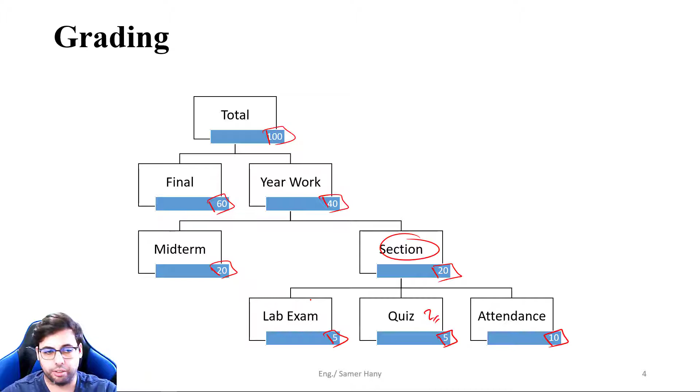Okay, before starting our first topic, let's give a brief introduction of our scope in this subject this semester. General Chemistry for Engineers is not pure chemistry - we're interested in the industrial scope of chemistry. The first 2 topics we'll discuss will be industrial applications of chemistry: the first is how to produce cement, and the second is how to produce lubricants, and we'll discuss all the different aspects and factors, like you'll see today shortly.

Then we'll go into calculating all parameters for ideal gases and real gases - pressure and volume calculations, temperature, and everything. After that, we'll go into thermochemistry and combustion reactions, because most industrial applications will somehow have a furnace or heating application, where we burn some fuel to get energy. By calculating the amount of energy required, we can use thermochemistry to deduct and calculate how much fuel we need and how much air we need for that fuel to be oxidized, burned, or combusted.

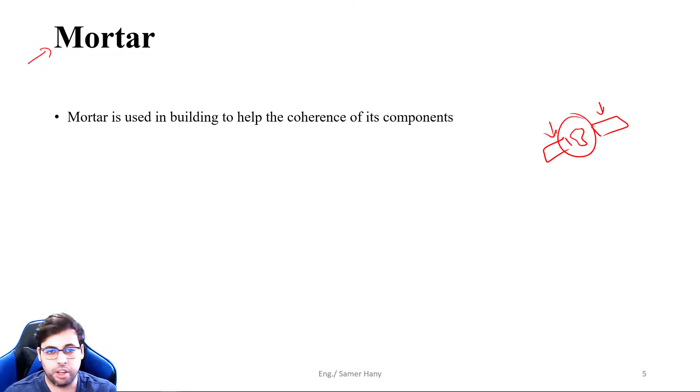We have two types of mortar: aerated mortar and hydraulic mortar. Mortar generally consists of sand in both types, and an active ingredient that reacts with something to harden or become solid. In the case of aerated mortar, it's slacked lime.

The slaked lime is calcium hydroxide, which reacts with air, or specifically carbon dioxide from air, hence the naming aerated mortar. The products of this reaction are calcium carbonate and water molecules.

As for the hydraulic mortar, it's sand plus cement. This cement is the active ingredient that reacts with water to harden and solidify, hence the naming hydraulic, coming from water. We won't discuss the exact reactions here because they are multiple reactions, not just a simple reaction like the aerated mortar. We'll discuss these reactions in a couple of minutes in this tutorial.

So why do we see hydraulic mortar very often and not aerated mortar? Because from a strength point of view, aerated mortar is much weaker than hydraulic mortar. So it's mainly used when there's no water present, or water is scarce or an expensive resource, like building in the desert, or building something small that won't have to withstand high load, like a fence or a wall.

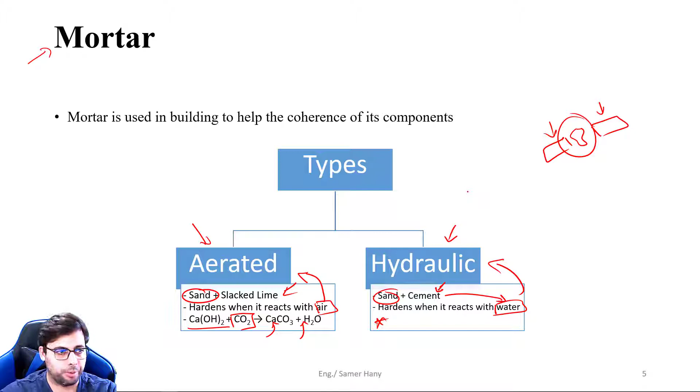In the desert for military purposes and stuff like that. But for hydraulic mortar, when we want to build units or entire buildings that will have to withstand very high loads, we need to use hydraulic mortar or cement, especially when using it in concrete to build ceilings and concrete blocks for withstanding high loads above them.

So first off, we'll focus on cement, because this material needs to be produced in very, very large amounts, because we use it in all the buildings around us. So it's a very essential compound or product.

The most common type of cement, the gray cement you see everywhere, is called ordinary Portland cement. Why Portland? Because this cement was actually found first in nature in Portland, not synthesized. Once we discovered this material and its properties, the strength it gains when it reacts with water, we started experimenting, checking, and analyzing the components inside that product to be able to produce it industrially on an industrial scale later. So this is ordinary Portland cement, OPC for short.

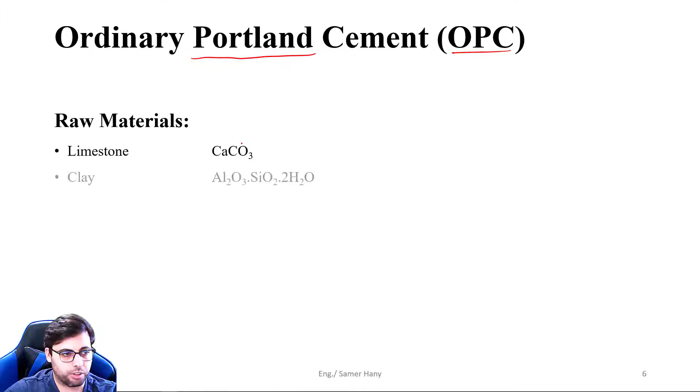To produce that cement, we need some raw materials. The raw materials are limestone, which is calcium carbonate; clay, which is aluminum oxide and silicon oxide bound together with two molecules of water in their crystal structure; and to a low extent, some ferric oxide. We'll see what this ferric oxide does and how it benefits our reaction.

So the cement is actually composed of four main oxides: calcium oxide, aluminum oxide, and silicon oxide, which are the components responsible for most of the functionality of the cement. As we see here, there is some ferric oxide, which is not always present in all types of cement, but it's an addition that we use in producing ordinary Portland cement.

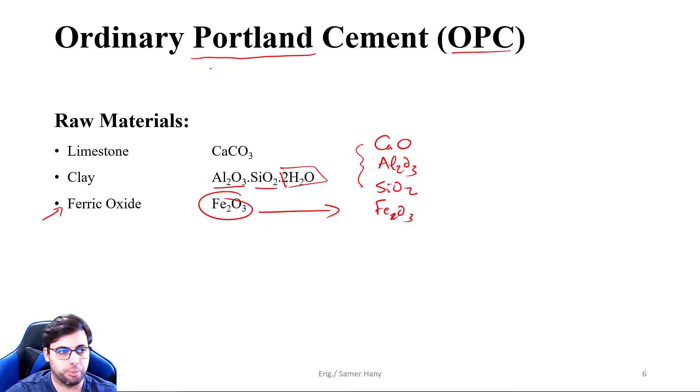Some notes here: the ferric oxide addition helps the formation of clinker. Clinker, which we'll discuss later, is the intermediate product in the cement production process. It helps the formation of clinker in the main reactor in the factory at lower temperatures, around 1300 degrees Celsius. Without ferric oxide present in the mix, this reaction would be at 1400 degrees Celsius instead of 1300, and this saves us some energy, fuel, and cost when producing the cement.

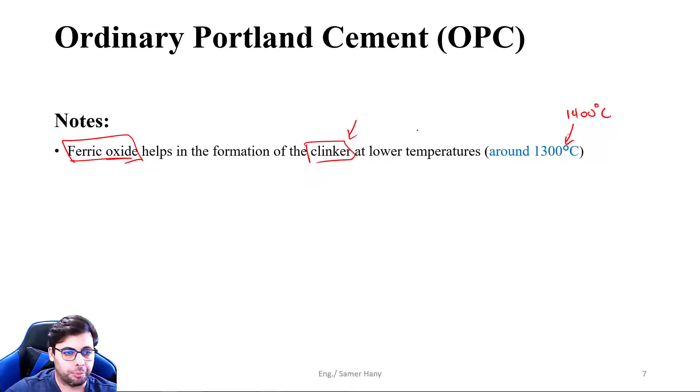This ferric oxide is actually the main reason ordinary Portland cement is gray instead of white. If we want to produce white cement used for decorations, it's basically the same, but we don't add ferric oxide, hence the higher price for white cement compared to ordinary Portland cement. A second additive we add is calcium sulfate, or gypsum, which is calcium sulfate dihydrate, with 2 molecules of water. This is added to retard or slow down the setting or solidification of the cement mix, the mortar or concrete. It's a retarding agent to give workers time to form the cement or mortar before it starts solidifying.

Okay, this is added to around 5% of the total mix, and we'll see in our production process right now in which stage it's added.

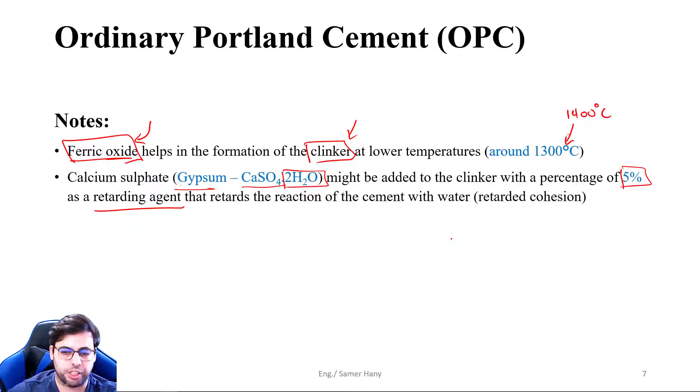The main components of ordinary Portland cement, responsible for its functionality, are calcium silicates. Dicalcium silicate is 2 calcium oxides linked to 1 silicon dioxide, and for short, instead of typing the entire chemical formula, we write it as C2S. So it's C2, 2 of the calcium oxide with 1 silicon dioxide. As we said, cement is composed mainly of oxides, 4 oxides. So when we see this C, it stands for calcium oxide. It's not calcium alone, and it's not carbon, because this is not a chemical compound, it's just a shorthand representation for this compound.

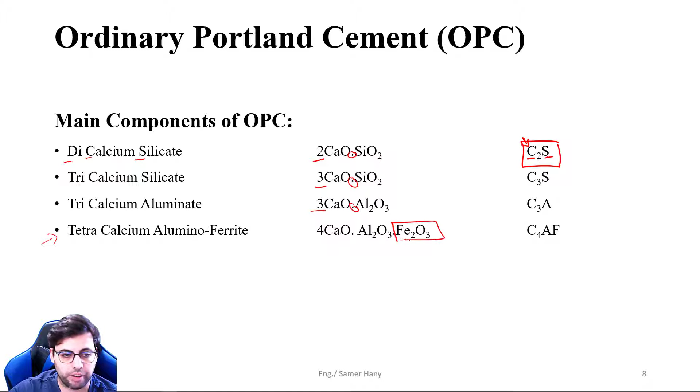Same goes for tricalcium silicate: 3 calcium oxide moles linked to 1 silicon dioxide mole, called C3S. For tricalcium aluminate, it's 3 calcium oxide moles with 1 aluminum oxide mole, so it's C3A. Then the 4th compound, formed due to the presence of ferric oxide, is tetracalcium aluminoferrite, shorthand C4AF. So that's 4 calcium oxide, 1 aluminum oxide, and 1 ferric oxide.

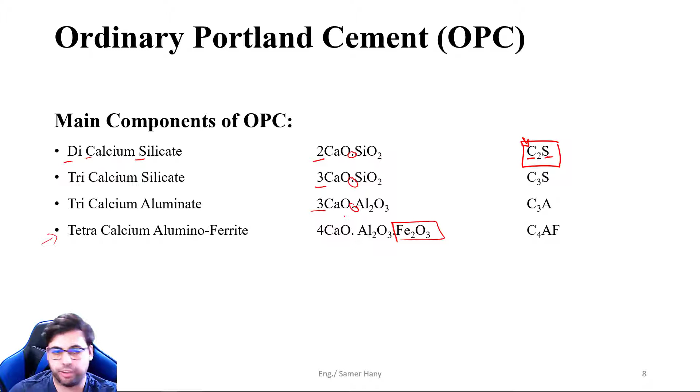So for the production process, we take these raw materials. The first step is crushing, because we just got these raw materials from the quarries and they are in big bulks. So we insert them in the first stage into a crusher to crush them into smaller bulks or smaller stone size. Okay, let's actually see this crusher in action.

So here's the crusher, let's just go over it. This is called a jaw crusher, because it's shaped like a jaw, and this is a stationary side...

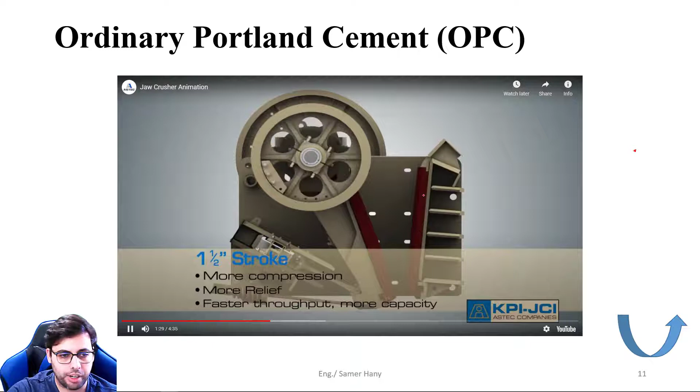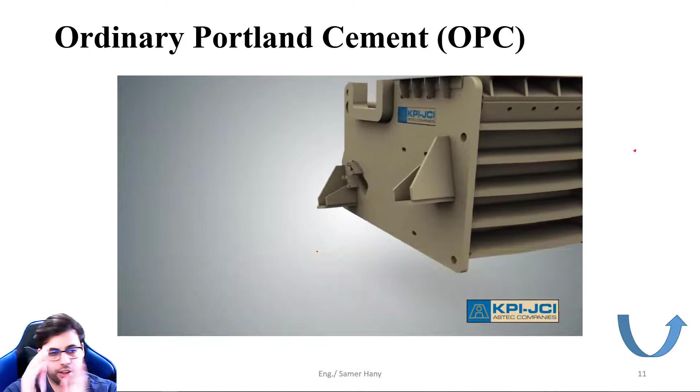So this is a stationary side, and this is a moving side. It's linked to a motor that simulates a jaw opening and closing, and all the bulk materials going in from the big opening get crushed into smaller size stones or solids, and go out from the smaller opening at the bottom.

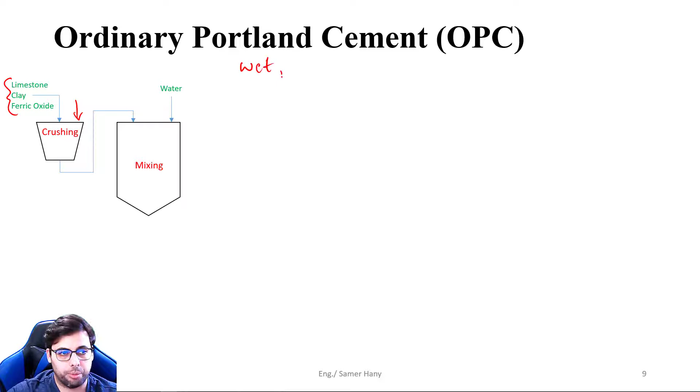Okay, let's go back to our process. After crushing, we take these solids mixed together from the crushing stage into a mixing tank, and in this mixing tank we add some water to help create a consistent mix or paste. Actually, the process of producing OPC that we're studying right now is called the wet process of producing OPC. If you research online, you'll find multiple processes used to produce cement. The most common are the wet process and the dry process, and we'll just study the wet process this semester.

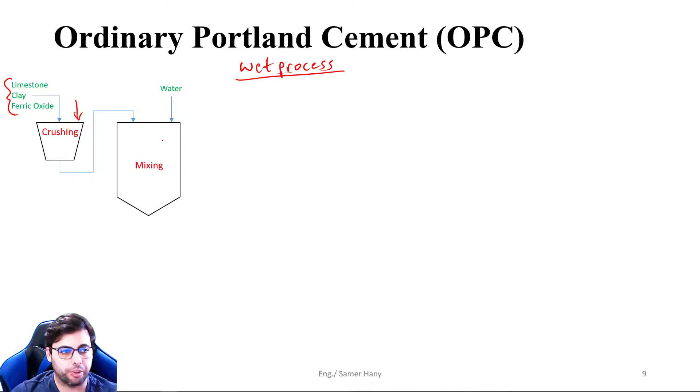So in the mixing tank we add water to create a more consistent mix, and after mixing we go into grinding. Why do we want to grind the material? To increase the surface area and gain a consistent powder, and mixing powders is easier and will produce a more consistent mix than having bulky solids.

So in this grinder, this is a ball mill. It grinds the smaller bulky solids coming out of the crusher into fine powder. Let's also see how this grinder works. This ball mill has some balls inside, made of a harder material than the raw materials we're using.

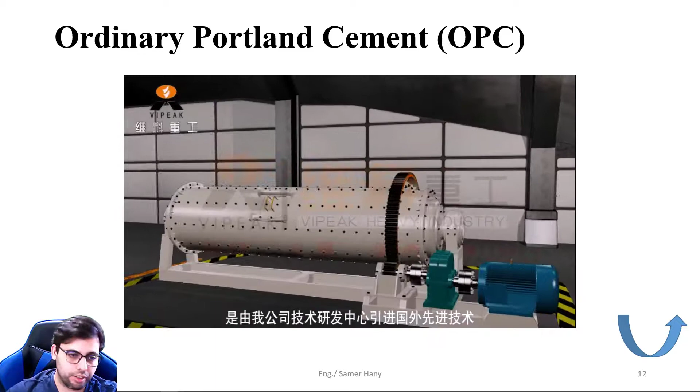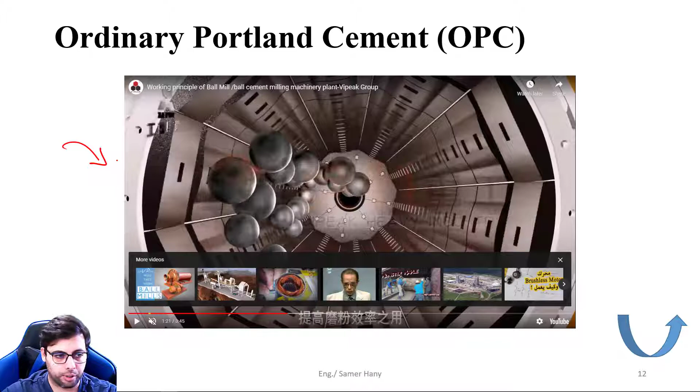It's a hollow cylinder that rotates around itself with some hard balls inside. We insert the material into this grinder or ball mill, and when the balls drop, they drop on other balls and the raw material bulky solids. Since the balls are harder than the material we want to grind into fine powder, these raw materials will be crushed further and will, in the end, be produced as fine powder. Okay, let's go back.

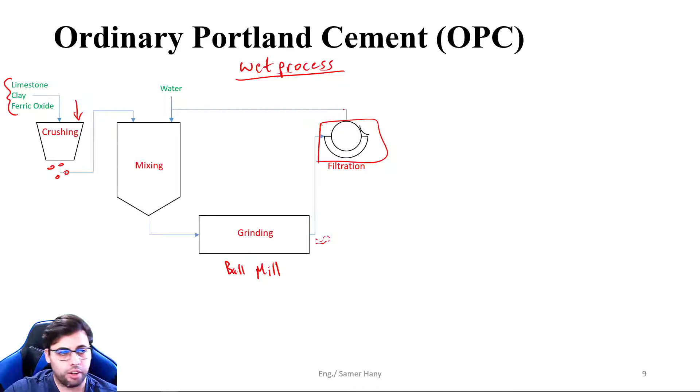This filter just splits the mix going into it into two streams. For this drum in the middle, it suctions the water, and this water is recycled to the mixing tank, while the solids go into the main reactor. The solids are retrieved from a knife, and we can also see how this filter works. This is called a rotary filter.

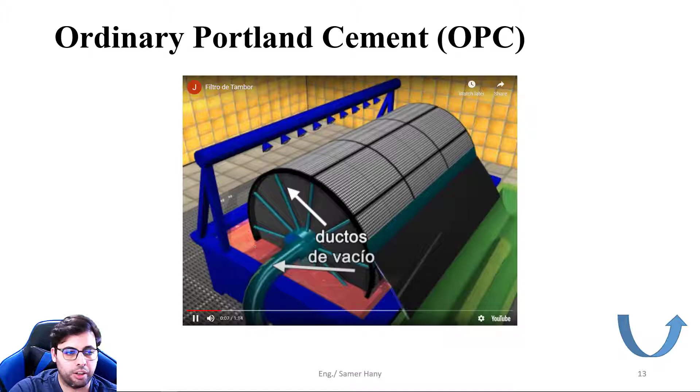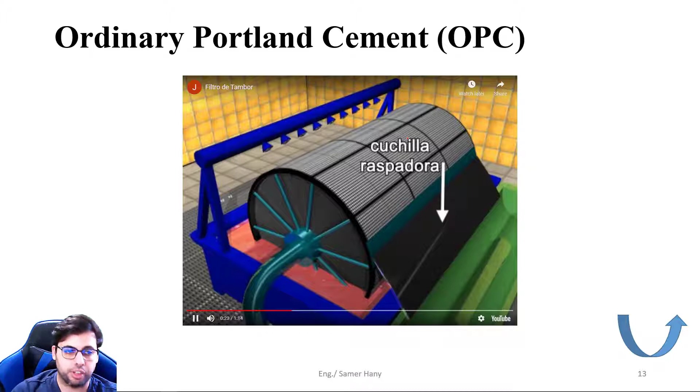This rotary filter consists of a drum that's rotating. There's a sink here in which we insert our materials, the suspension of water and solids, and this drum rotates around itself. The drum surface is actually a filter fabric, and this pipe is linked to a suction or vacuum pump that suctions the water off the surface, while the solid cake resides on the surface.

The solids can't go into the drum, and once the drum rotates around itself, they reach this sloped knife, and this knife scrapes the solid or cake layer off of the drum, while the drum keeps rotating around itself.

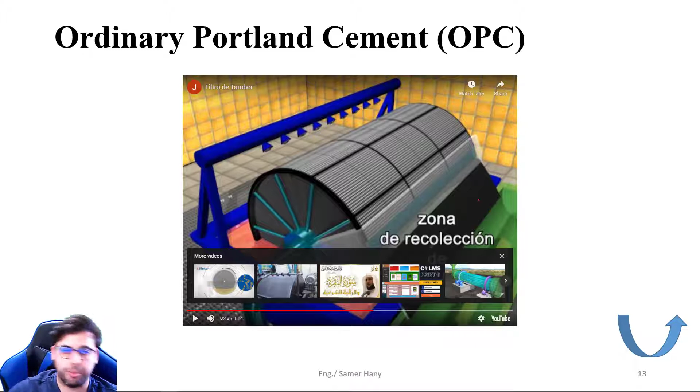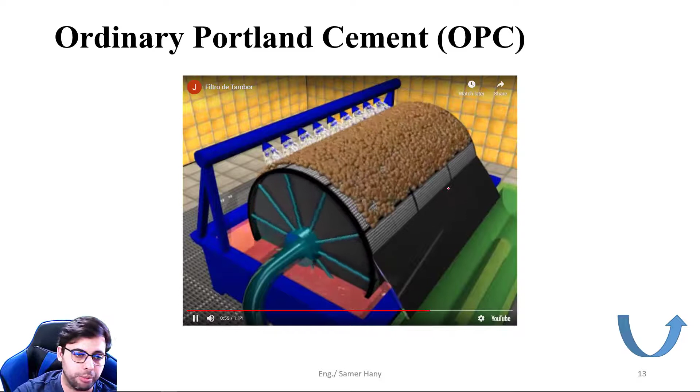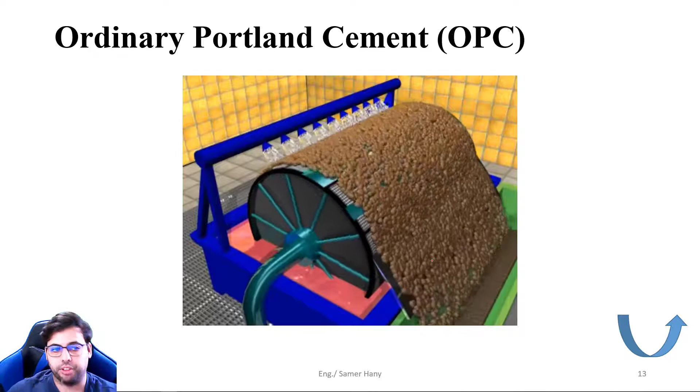There's an animation here showing this. As you can see, the solids cannot go into the filter medium. The suction takes most of the water, though not all of it, and then this knife scrapes all of the solid or cake off of the surface of the filter drum.

This cake produced is mostly solid mixed with some water. So we have removed most of the water that we can remove, and the remaining water we can just get rid of or vaporize inside the reactor.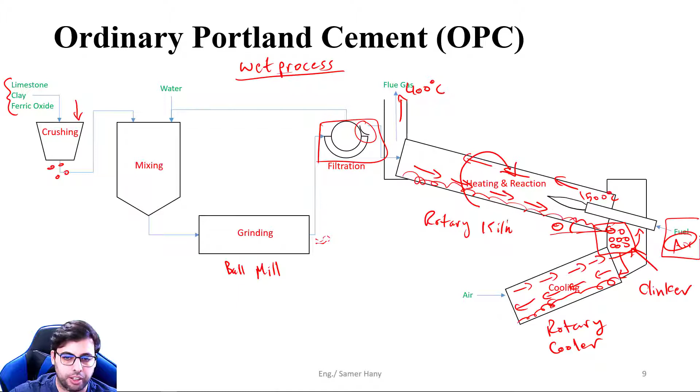We use it in the burner with some excess air from the surroundings. This depends on calculations we'll discuss in the thermochemistry chapter. The clinker leaves the cooler still a little too hot, so we do a further cooling stage.

This further cooling stage is the clinker pile. This is just a pile of clinker to let it cool slowly until it goes down to around the surroundings or ambient temperature. This is just a pile in an open area—we pile the clinker and let it cool for some time.

Then we grind this clinker, because the clinker produced from the kiln is porous balls of solid, about 1 to 2 inches in size, so they're not actually powder. We take this clinker after cooling and insert it into the grinding phase, or the ball mill—this is also a ball mill, or could be any other type of mill.

We grind this clinker to produce fine powder cement, and add all the additives we need, mainly gypsum, and any other additives in this step, since it will be mixed thoroughly with the clinker to produce cement. The last stage is to pack this cement into 50 kilogram packs, and then we've got the final product cement.

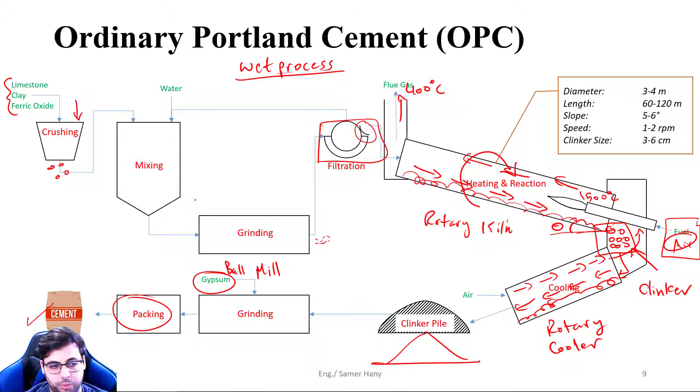That's what we'll discuss later. Before moving forward, we need to know how we'll determine if this cement is according to standards or not. So after producing the cement, we need to know the reactions this ordinary Portland cement goes into with water.

We said we have 4 main components, and we can say there is C4AF, because this compound plays a similar role to C3A, so it's not present as an individual product, and it's always in a small percentage. We won't go into the chemical reactions themselves—we'll just mention which component of the main cement compounds is responsible for which role or function in the solidification and hardening of the cement.

And the reaction time, which is the most important factor for us right now: the reaction time for C3A is 6 minutes to 3 hours, so it's the fastest component to react with water, and as we said, C4AF plays a similar role to C3A. This is responsible for the initial setting of the cement—the initial solidification without any strength, just transforming from a paste into solid, no strength yet. Second is the C3S, the tricalcium silicate.

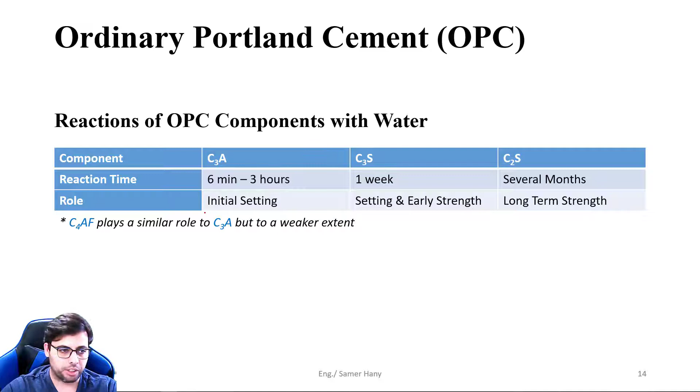So this is just a schematic diagram, not to scale, just to show us the strength of each compound. The C4AF reacts faster than the other compounds, with C3A and C3S. C4AF is very weak here, the strength level is very weak, and C3A is just above it.

For C3S, it starts a little slower in the beginning and then rises fast like this. So C3S reaches a very high strength level, and this is why it's responsible for the early strength of the concrete.

C2S will start slow at the beginning because it can't compete with C3S for reacting with all of the water. After C3S is almost done or completely done, the C2S compound starts reacting somewhat rapidly with water, or to a faster extent, and goes to nearly the same strength level at the end of the reaction.

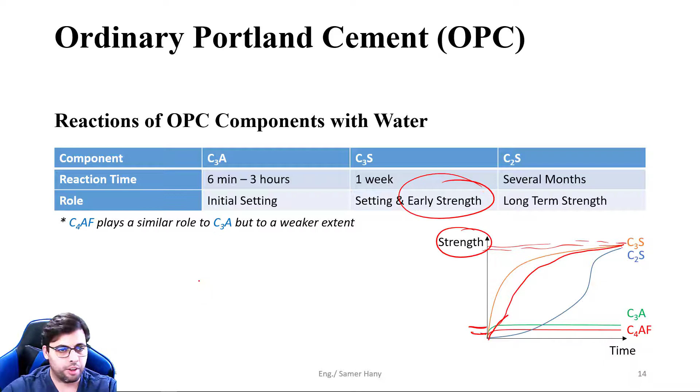So let's dive into the quality assurance tests. The first standard test is the hydraulic factor. The hydraulic factor just measures the relative amount of calcium oxide relative to all of the other oxides in the mixture or in the cement.

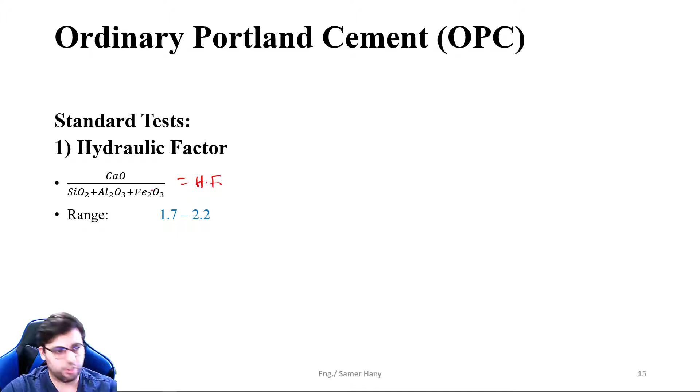Let me remove the marks. The range for this hydraulic factor, let's call it HF, must lie in the range 1.7 to 2.2. You don't need to memorize this expression, you just need to know what it represents or what it measures, the range for that particular factor, and what would happen if we lie outside the boundaries, whether it's lower than the minimum or higher than the maximum.

If the hydraulic factor is lower than the minimum, this means that C3S will be formed to a lower extent than the standard amount. Why is that? Because calcium oxide is actually the main oxide that reacts with all of the other oxides in all of the compounds. All of the compounds start with C, of course, because it reacts with all of them.

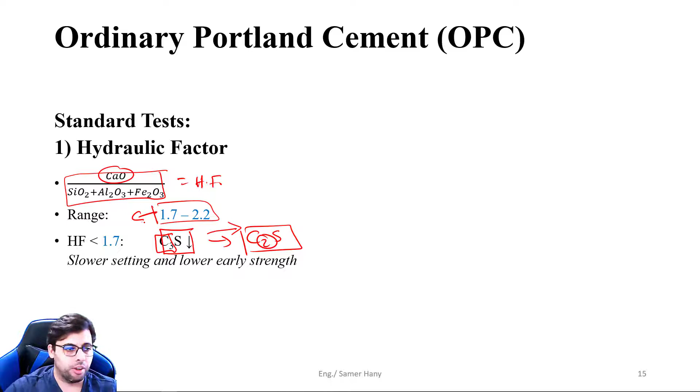If we see here, C3S has a very high content of calcium oxide, and we have another compound, C2S, between calcium and silica, which has a lower concentration of calcium oxide. So when the amount of calcium oxide gets lower, the reaction will actually be directed more towards C2S than C3S, since there isn't enough calcium oxide to react and form C3S in the proper amount.

If we know the features, functionality and roles of each of the components, we can know exactly what would happen when one of them is affected by making it higher or lower than the standard amount. Since C3S was responsible for the setting and early strength of concrete, a lower amount of C3S will result in a slower setting and lower early strength.

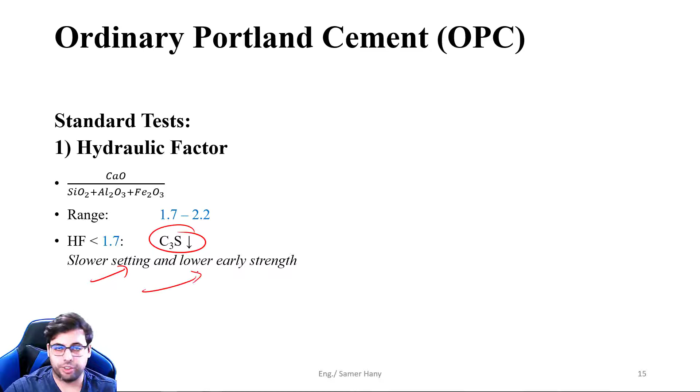So what happens if it exceeds the maximum? Then we have free lime in the cement. Free lime means the calcium oxide already reacted with all the available other oxides, and there is some more calcium oxide that didn't find any oxides to react with. Why is this a problem for us? This calcium oxide is the quicklime, if you know quicklime from studying chemistry before. This reacts with water and produces a high amount of heat. So this is a highly exothermic reaction which produces heat.

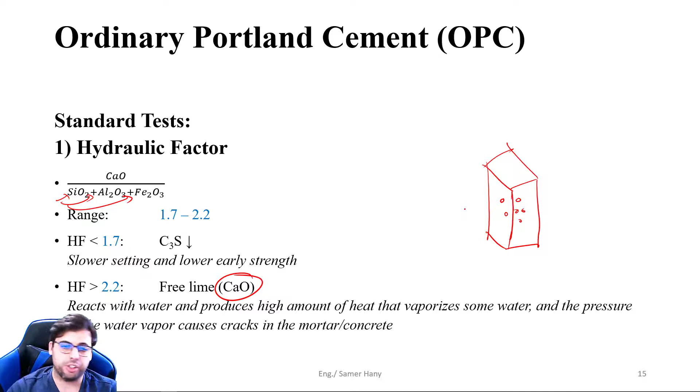What would happen if we have a concrete block like this with an exothermic reaction happening inside it, and there is some water around this reaction? The water will start vaporizing and bubbling inside that concrete block, and the water vapor pressure will keep increasing as the reaction goes on and the temperature increases, and this will eventually build up enough pressure to create its own path and get out of the concrete block.

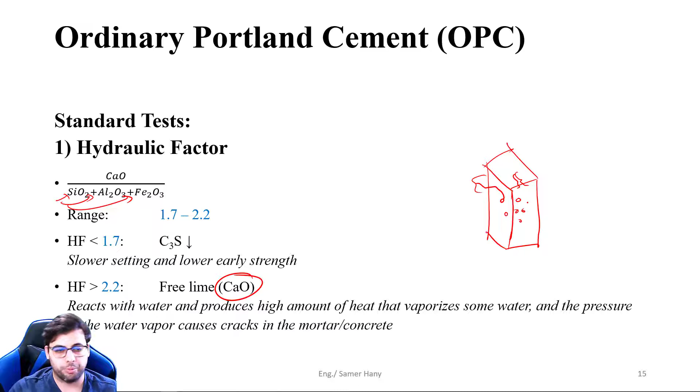So it will produce or result in some cracks in the concrete, so that the water vapor can go through them and out of the concrete block.

This test was actually replaced with a newer standard test, the lime saturation factor, LSF. This takes into account that when analyzing the cement, not all of the calcium oxide comes from the clinker or the main components. Some calcium oxide actually got into the mix from adding the gypsum in the last ball mill. So this is just a correction factor to adjust for the calcium oxide coming from the gypsum, and some coefficients to adjust for the mass balance.

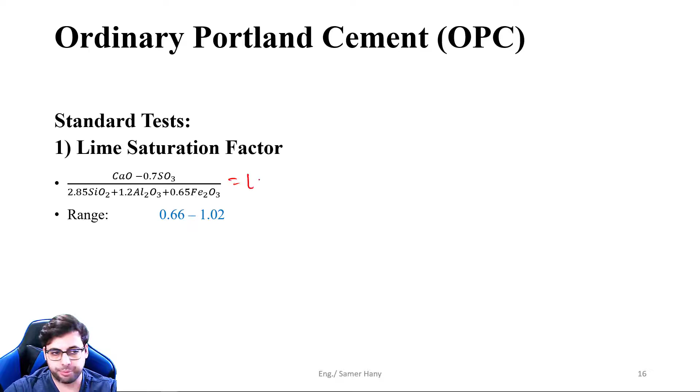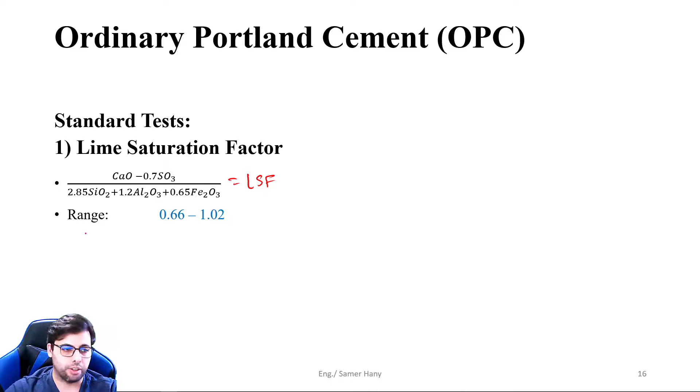As we said, we do not need to memorize the expressions. We just need to know what this test is actually measuring or representing. Of course the LSF will produce different results numerically, and the range will be different - between 0.66 and 1.02. The same goes if it's lower than 0.66 as the hydraulic factor, and if it exceeds 1.02, it's also the same as with free lime.

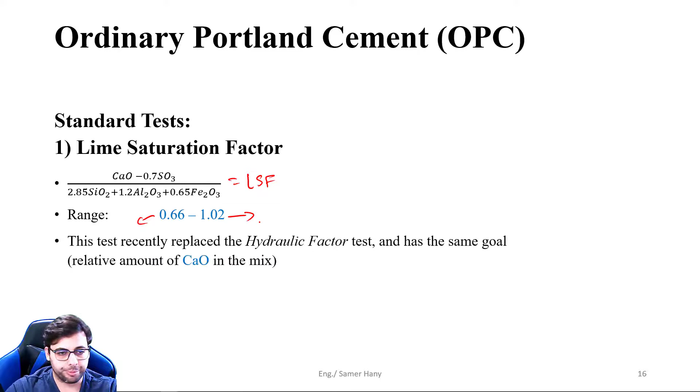Moving forward to the next test, the silica index. The silica index measures the relative amount of silica, or silicon dioxide, to the other oxides in the mix, except for calcium oxide.

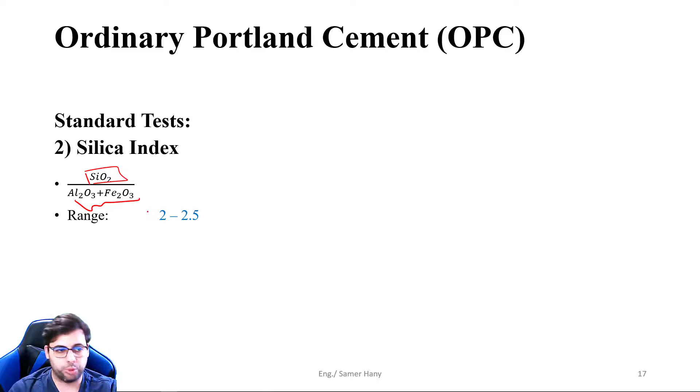This range is from 2 to 2.5, and if the silica index goes below the minimum of 2, let's focus first on these two compounds which have a higher percentage of silica: C2S and C3S. By mole percent, C2S has 1 silicon dioxide to 2 calcium oxide, so by mole this is 33%. We can convert this to by mass, but we'll represent it by mole for now. As for C3S, this is 25%, because 1 silicon dioxide is inside the entire compound, which is composed of 4 different moles or molecules. So C2S has a higher percent, and C3S has a lower percent of silica.

When the silica goes below the standard range, that means the compound with the higher silica percent will form in a lower extent, and the compound with the lower silica percent will form in a higher percent. So C2S, which has higher silica content, will form in a lower concentration, and C3S, which has lower silica content, will form in a higher amount. Consequently, C3A will increase because we didn't consume as much calcium oxide since the silica is already down. So setting and solidification will be very fast since C3A and C3S are both up in amount.

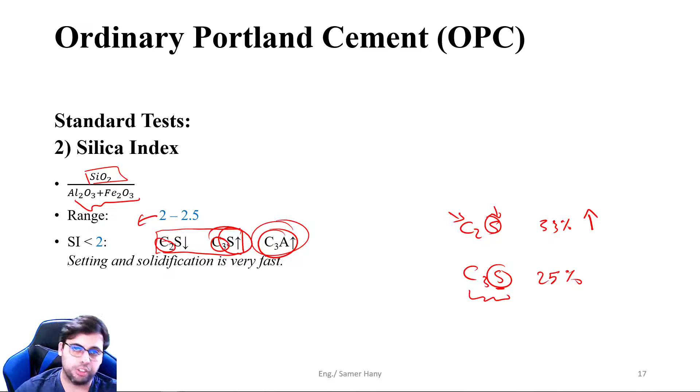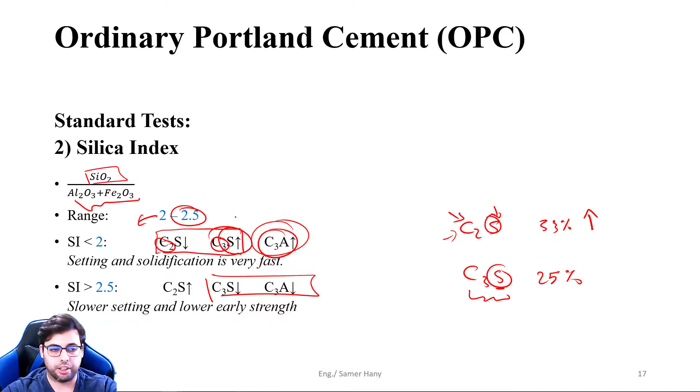The reverse happens if the silica index falls above or exceeds the maximum limit. So C2S, which has higher silica content, will form in a higher amount than usual, and C3S and C3A will form in a lower amount than usual. This indicates slower setting and lower early strength of the concrete, since C3S is lower.

The third test is the magnesium oxide percentage, and this percentage should not exceed 5%. A higher percentage of magnesium oxide means that the quality of the used limestone is poor.

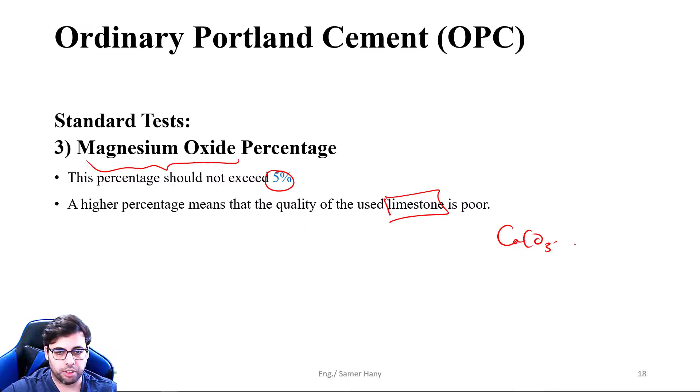This should surprise you - magnesium oxide. We didn't mention magnesium oxide in any of the previous slides as raw materials or additives to the cement. Where does this magnesium oxide come from? It comes from the limestone or another raw material called dolomite, or dolomitic limestone, because in the quarries, limestone, or calcium carbonate, is usually linked to magnesium carbonate as well. Unless we have a very pure quarry with very pure limestone, like 99.9% calcium carbonate, it's possible to find some magnesium carbonate linked to it as well. This raw material is called dolomite when the amounts are equivalent, and if we just have a small amount of magnesium carbonate, this will be called dolomitic limestone.

This indicates that the limestone is poor for our application or industry, because 5% in the mix means that more than 5% of our total cement is not an active material responsible for sticking the blocks together and forming strength. It's just an inert solid inside our mix, not helping the function of the cement. So if we calculate our loads and need 100 kilograms of cement for a particular application, maybe 5 to 10 kilograms will not actually contribute to the strength and coherence of the building unit, and we're underestimating the cement we're using. It will fail at a lower load consequently.

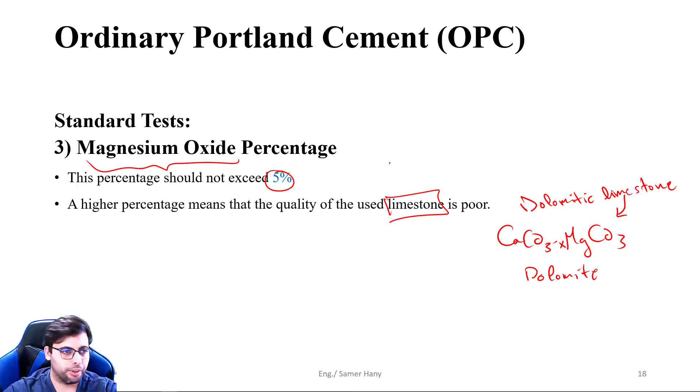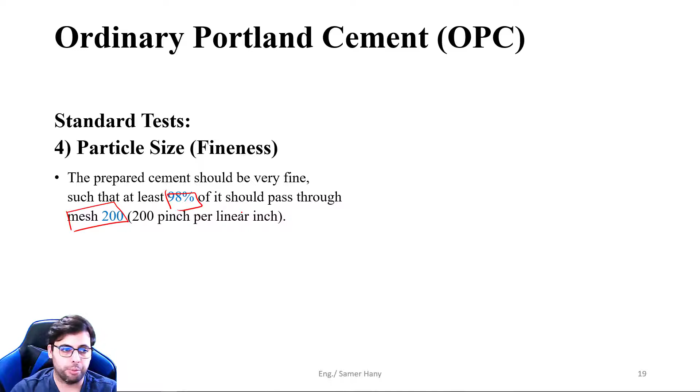So the particle size, test number 4, is the particle size or fineness of that cement powder. The standard for fineness is that the prepared cement should be very fine, such that at least 98% by mass of it should pass through a screen size of 200 mesh. The mesh is represented by the number of pinches or openings per linear inch. We'll see that in a moment.

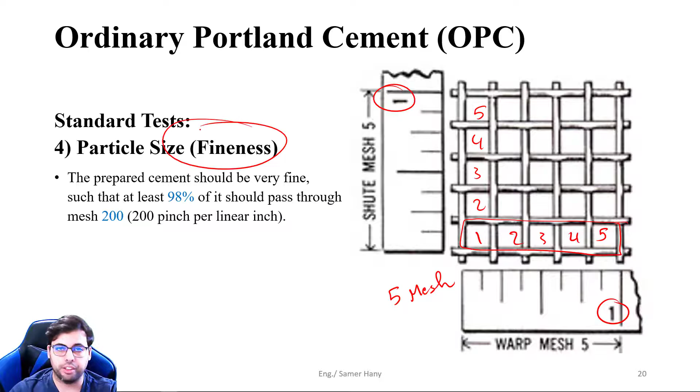How do we measure the mesh? If we take a sample of that screen, 1 inch in any linear direction, and count the number of openings or pinches inside that inch, that's the mesh number. For this particular screen we sampled, we have 1, 2, 3, 4, 5 openings in 1 linear inch, and this could also be done in the other direction, so it doesn't matter which direction we choose. We just need to sample 1 inch of the screen and count the pinches inside. So this would be a 5 mesh screen opening. That's how we measure or quantify the fineness of solid powders.

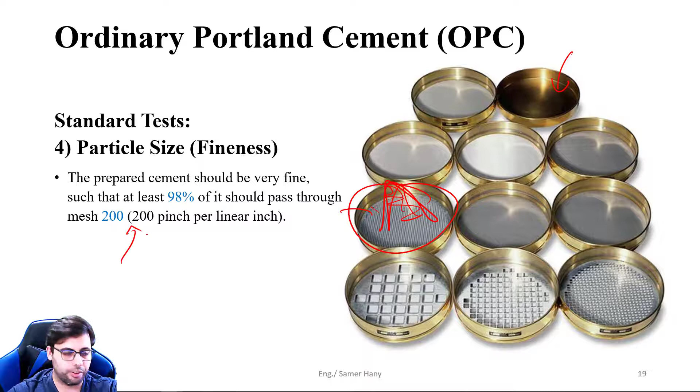Okay, and this means expending more energy, but we need to meet the standards. The 5th test is the setting time. Setting, as we discussed, is the initial solidification of the cement to transform into the solid state. This test is done to test the speed of cement solidification.

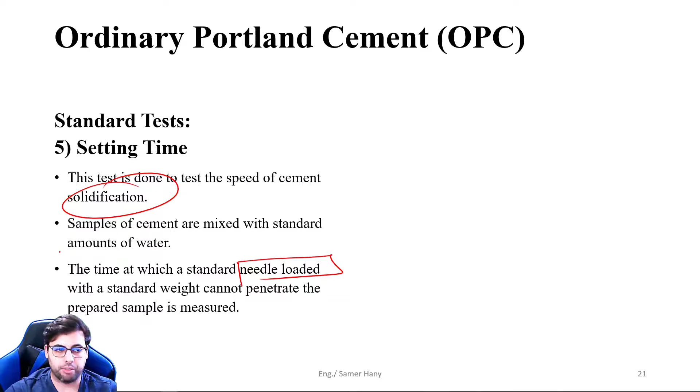Samples of the cement are mixed with standard amounts of water, making a slab of cement, and that slab will be tested to see how long it takes for it to solidify. So the time at which a standard needle, with a standard weight, cannot penetrate the prepared slab or sample of cement, this is called the setting time.

Okay, every minute or every couple of minutes we take that needle, drag it up, and leave it to fall under the standard weight, and see if it can penetrate this slab in this ring or mold or not. Once it cannot penetrate the surface of that slab, then this is called the setting time.

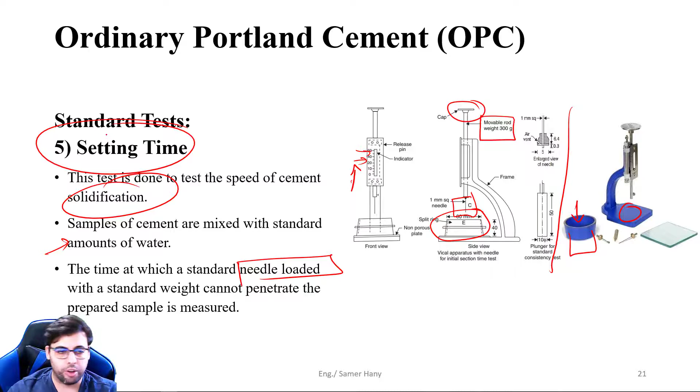This is the 5th test that we need to check. After measuring that time, we go into the standards and see, okay, is it within the standard time or not?

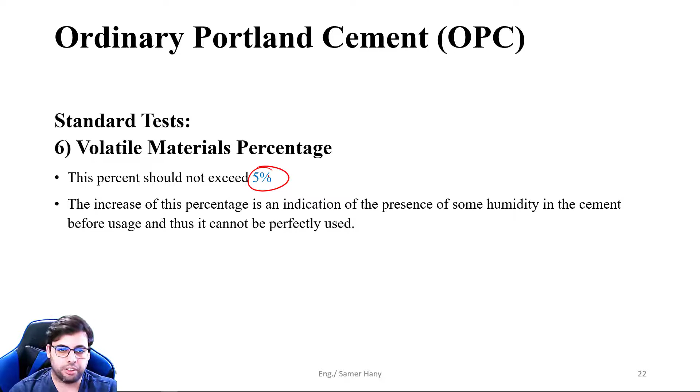So the 6th test is the volatile materials percentage. This percentage should not exceed 5%, just like the magnesium oxide. This indicates that the cement has some humidity content in it. This humidity will actually start reacting with some of the cement inside the packs, and will render it useless, or it will not be used perfectly when we need to apply the cement in real life. So in storage, this 5% of humidity or more will be reacting with some of the cement and converting it, or solidifying those particles, instead of having all of the cement as active material that will react with water when applied to solidify and stick together.

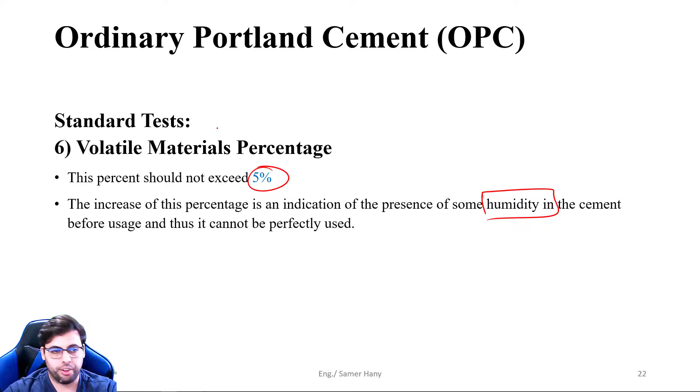So this means not only did we lose 5% or more of the cement content as humidity, we're only actually working with 95% of the actual mass of the cement. This 5% just spoiled or reacted with some of the 95% of the cement and made some of them useless. So we may end up with like 10% of useless mass underestimated in our calculations when we apply it.

All right, the 7th and last standard test for the quality control or assurance is the percent of sulfur trioxide. This should not exceed 3.5% of the total mix.

And this sulfur trioxide, where does it come from? It comes from the calcium sulfate, or the gypsum we added. When analyzing this, it will be broken down into calcium oxide plus sulfur trioxide. And of course, the water vapor will evaporate.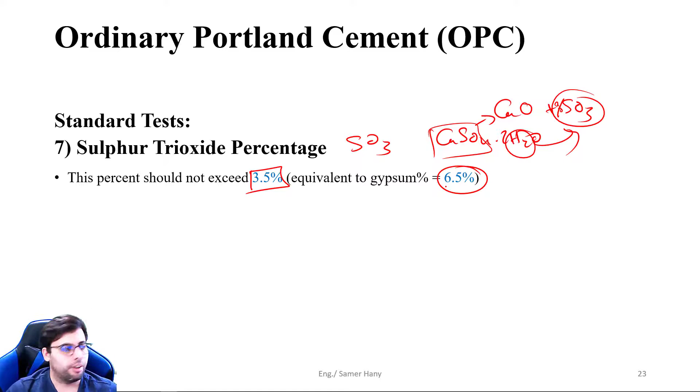So the percent of sulfur trioxide given by the analysis should not exceed 3.5%, which is equivalent to 6.5% gypsum. Any more than that means we've added too much gypsum, and the solidification process or reaction will be too slow for the application.

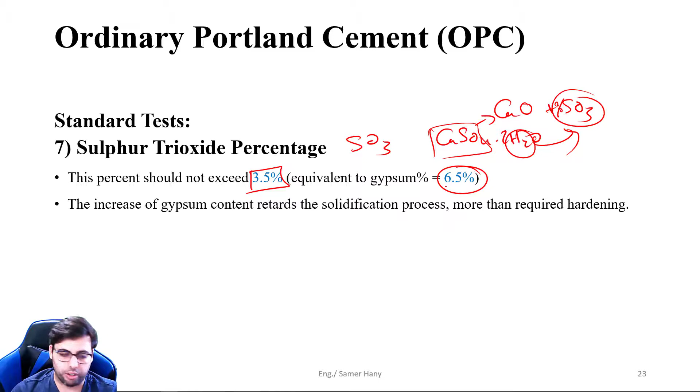All right, that's it for the ordinary Portland cement. Now we'll just briefly mention a couple of other types of cement, because it's not only the ordinary Portland cement that's out there, but it's the most commonly used and maybe the only one you've seen in real life applications around you, or maybe you also saw white cement for decorations. But these other types do exist, and if you look them up on the internet, you'll find more types than the ones we'll mention right now.

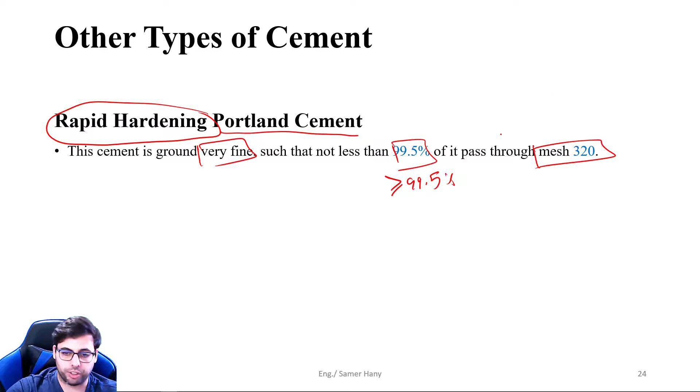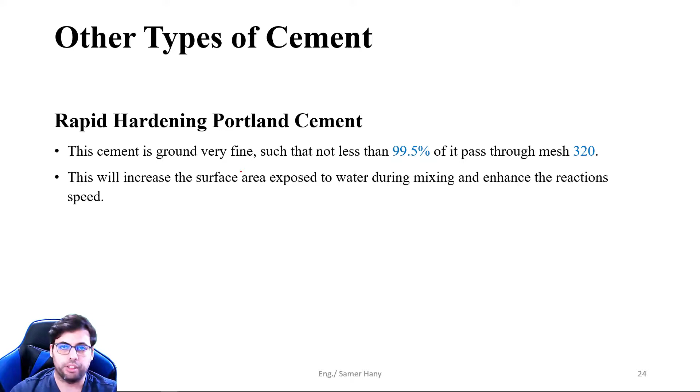So the first type is the rapid hardening Portland cement, as the name implies, it's not ordinary Portland cement, it's rapid hardening Portland cement. What do we do extra to this cement to make it rapid hardening? We just physically treat it to grind it more, so that it's very fine, such that higher than 99.5% of the mass passes through a 320 mesh screen. This is much finer than the ordinary standard for ordinary Portland cement - it's 99.5 instead of 98, passing through mesh 320 instead of mesh 200. This will increase the surface area exposed to water during mixing and the solidification process, and will make the reaction go faster.

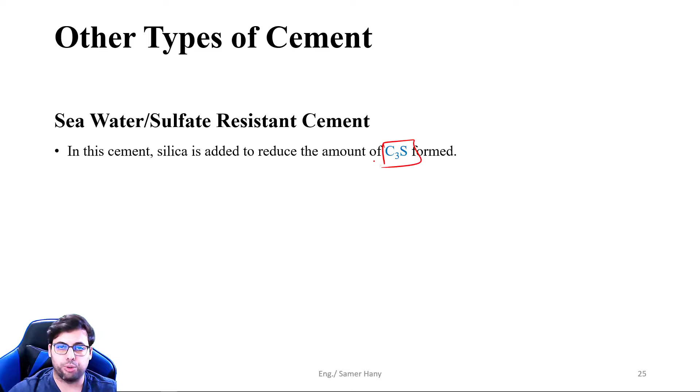The second type is the seawater or sulfate resistant cement. This cement will be resistant to seawater or the sulfate salts inside of seawater. In this cement, silica is added to reduce the amount of C3S formed inside the reactor. Why is C3S a problem for us in this particular type of cement? This is because in the reaction of C3S with water, it produces a high amount of calcium hydroxide.

This calcium hydroxide, when present, will react with the sulfate salts in water. So we need to decrease it to reduce the formation of calcium hydroxide in the concrete pores, making it more resistant to the sulfates in seawater.

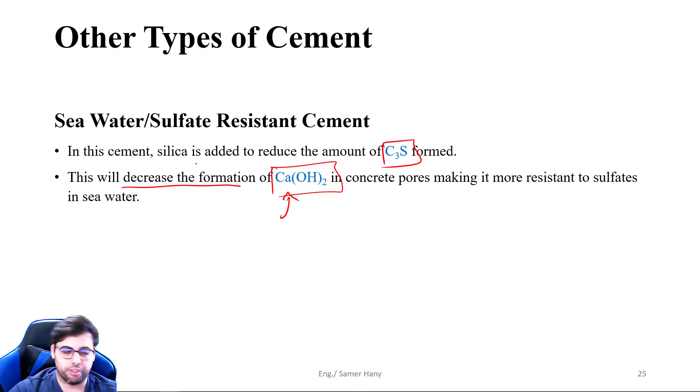The third type is iron slag cement, which, as the name implies, is a mix of iron slag plus cement. It's prepared by grinding furnace slag from iron furnaces with the addition of some Portland cement. We're mixing iron slag, a waste product of the iron industry, with some Portland cement. The iron slag contains the same oxides as ordinary Portland cement, but of lower quality.

So why would we be interested in a cement of lower quality? For two reasons. First is the price. This is more economic if we're using the cement for simple applications that don't need to withstand loads, so we can't use it in reinforced concrete. We can just use it to build a wall or something that doesn't have to take high loads.

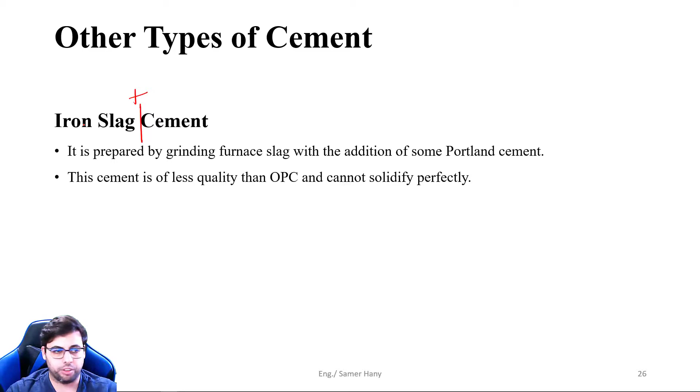The second reason is environmental: we're utilizing a waste product from some industry in our product, which helps the environment because we don't need to find a way to safely get rid of this iron slag from iron furnaces and spend money to treat it in accordance with environmental regulations. We can just use it as a byproduct in a different product. So it's not preferred to be used in reinforced concrete since it's of lower quality.

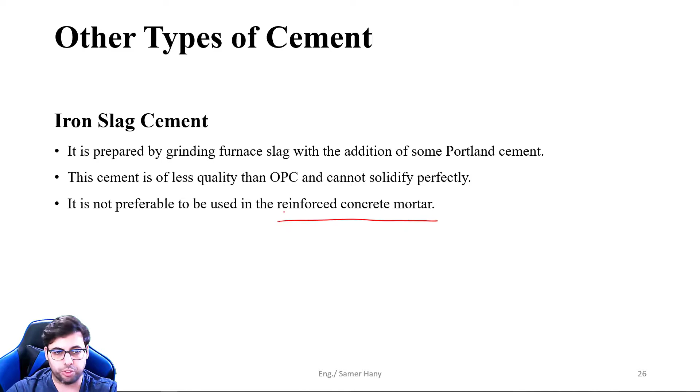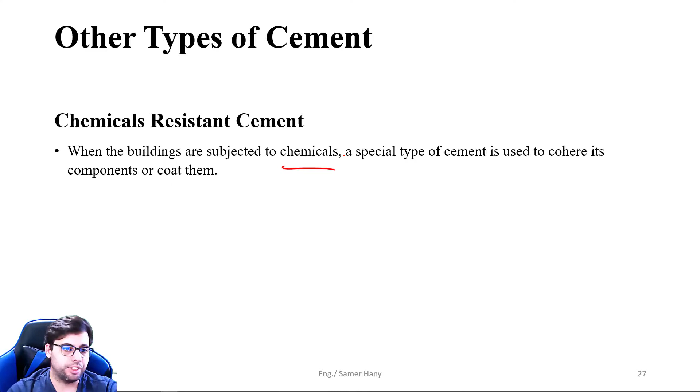This is actually the first type of cement where we're not just treating the usual ordinary Portland cement with some special treatment or addition - this is a completely different type of cement. The term cement just means cementing or solidifying. This cement is composed of some solid material in the form of pellets or fine powder, mixed with liquid mixtures to produce a resin product or polymer that solidifies after a while. In essence, this cement is just a mixture of two things.

The first thing is a solid material to give it strength - this could be fine sand or graphite - and some liquid mixture. This liquid mixture is actually a polymerizing mixture, like epoxies, where once the liquids are mixed together and react, they start cross-linking or polymerizing and create a polymer plastic layer. This first has a sticky feature so we can stick different blocks together or cohere them, and it should have some strength so that the building unit is strong enough to withstand at least some load.

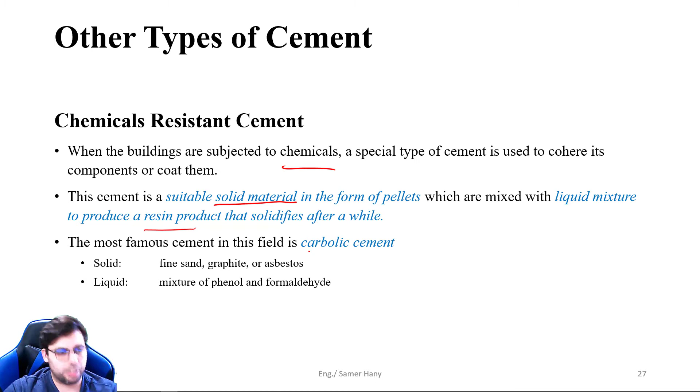The most famous cement in this field is carbolic cement. The solid is fine sand, graphite, or asbestos, and the liquid is a mixture of phenol and formaldehyde. When liquid A and liquid B are mixed together, they start polymerizing, forming a phenol formaldehyde polymer mixed with the solid. This is used as the paste or mortar to stick building blocks together or coat them to prevent any chemical reactions, since it's inert to chemicals, and to prevent deterioration or corrosion of these blocks.